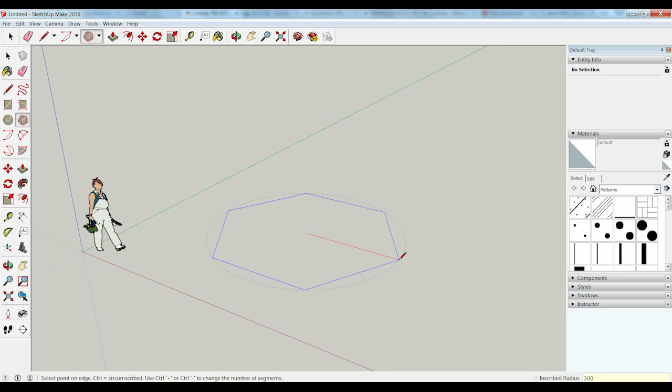The second thing is you always start with the center of the polygon, the hexagon we're drawing now, so click anywhere near here. Then you drag but don't click, just drag out. I try to be parallel with the red, which is the x-axis, and the inscribed radius you can see now is about 2300 millimeters, which is not correct because we need a 3000 millimeter radius, making a 6000 millimeter diameter.

So I type in 3000 and enter, and there you have this blue hexagon. It's quite big compared to Lisanne here, but it's not too big because we're gonna cut it in half.

So the second step is we go to the line tool, this little pencil on the top left corner, and it's very smart software that SketchUp offers. The snapping is automatically done for you, so you just go near the endpoint, one of the endpoints. Of course I'm going across in parallel direction to the red axis, so I start with this endpoint, so it snaps to it and turns green, the little dot.

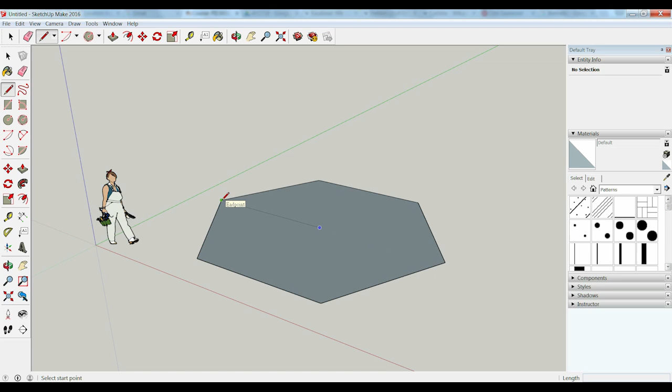Once it turns green, you can click on that and extend it while it's orthographically along. You can see the red line along the face, running parallel to the x-axis and all the way across to the opposite point, and it snaps to it. It says endpoint, and then you can click.

So this is perfectly done to bisect the hexagon, and we only need half of this. The easiest way is to use your eraser tool, which is on the top left corner, this pink eraser tool here, and erase one of these 3 edges, and then it will get rid of the face and all the edges associated with that half of it.

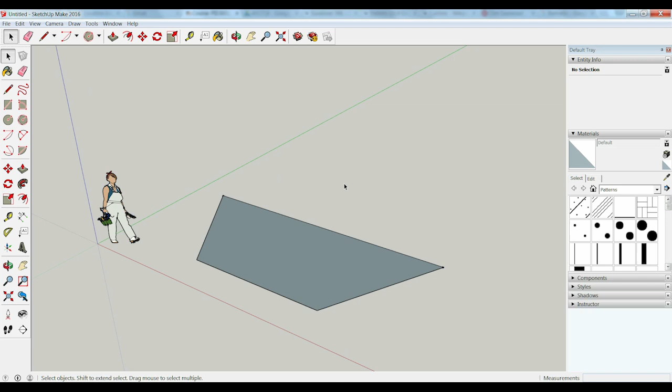And then we have the base for the window display, or the window to be built already, and you want to double check. You can always measure the length. I'm not concerned about the length of these 3 sides; all I wanted to do is check that I have 6000 millimeters across, and look, so we're good to go.

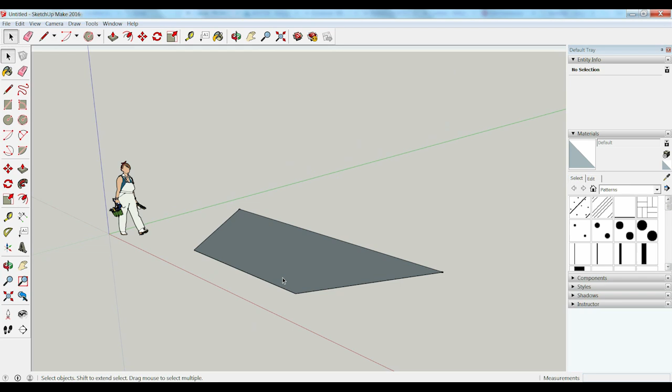Now we are about to bring it into a volume. So first thing is you need to know the height measurement. Pull on this face and type in 600, so that's 600 millimeters in height. And you want to click, but before you click, you want to press Control, that's the CTRL key.

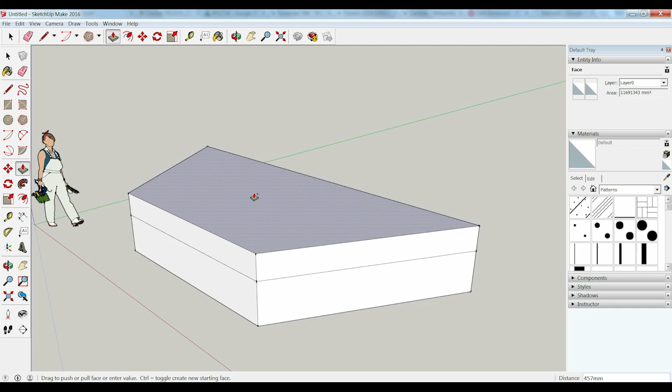And you see a little plus sign next to the push-pull tool. So when you now click again, you're not changing what you've done before, you're not changing the height of the first segment, but instead adding an extra one to it. And we want to type in 2000 millimeters, so that's the height of the window.

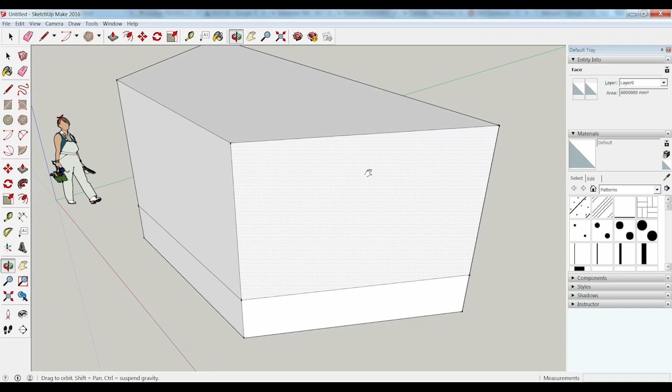And then, okay, the last segment would be 300 millimeters, so you want to keep doing that and type in 300. So there you have the whole shape, the whole volume, the whole form of the window display.

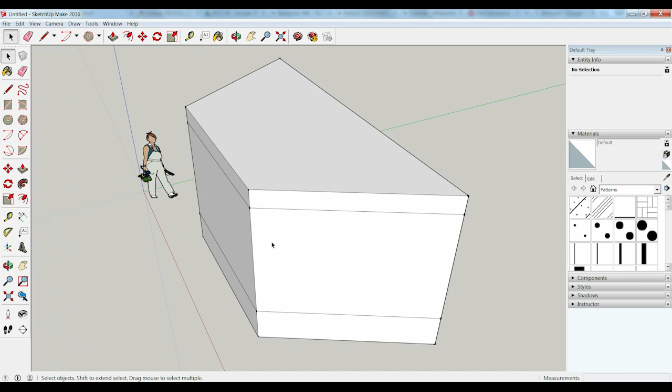But we don't need that much depth to the sides, so we want to cut that in half again. So the next step would be to repeat what we did before when it was like a base. We could definitely have done that before we pull it, but it's just for demonstration.

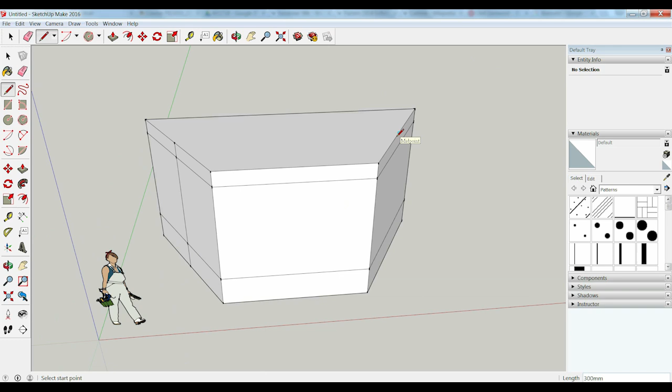I'm gonna show you this. It's the same deal, that if we do this over, even in 3D forms, you can always draw lines by snapping to the midpoints or endpoints or any points of your choice, to cut or create edges or bisect anything that your design calls for.

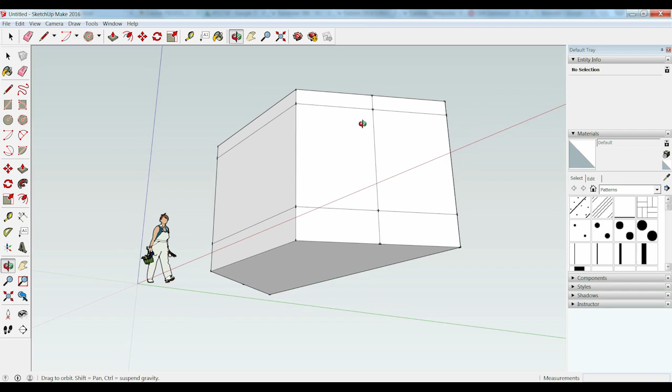Make sure you go through the bottom too, from all four sides - top, bottom, left and right. That's the same as what we did before, just erasing the back edges of all these faces. And there you go, you have this.

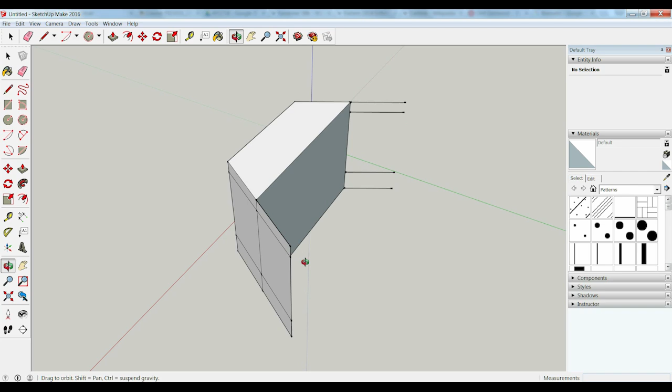Of course, I'm doing some extra work just to show you around how you could go about cutting a 3D form in the 3-dimensional space.

Well, the last bit is you have to draw in the lines that you need. Don't forget about these crease lines or segments in the back of the window, because if you don't, later when we make the windows, it might not work if we want to add some depth to it or change details. So this is a play-safe way that I always do - I try to keep all the faces quadrilateral so they all have 4 sides. No matter what shapes they take, they always have 4 sides. That's one important principle in 3D modeling.

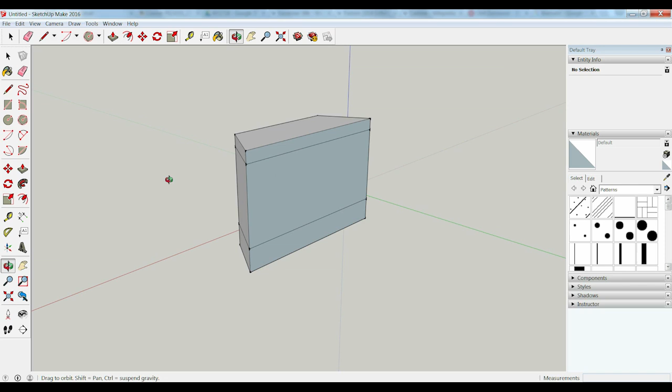The next step would be to do the windows. So now I activated my offset tool. It's really up to you how wide you want to go, but I am going to stick with just 50 millimeters to offset the windows.

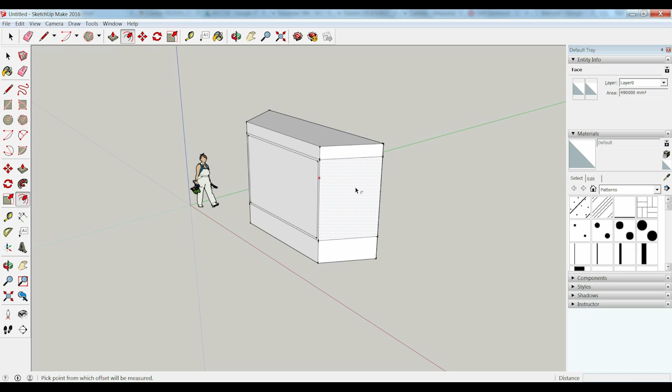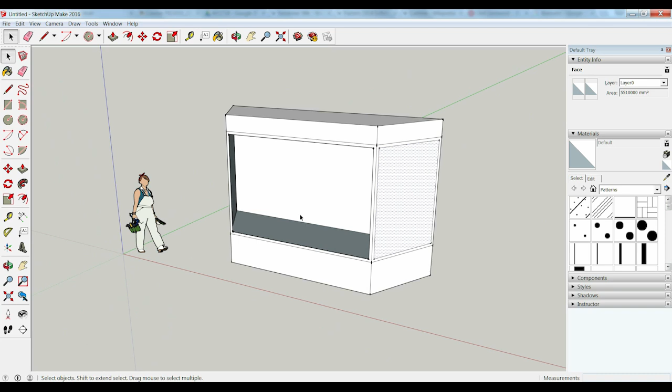And we put it to the sides, like that. Of course, I don't have a true window now until I go about deleting these faces, right? So I just delete them, and now you have like a 3-sided half a hexagon kind of shape.

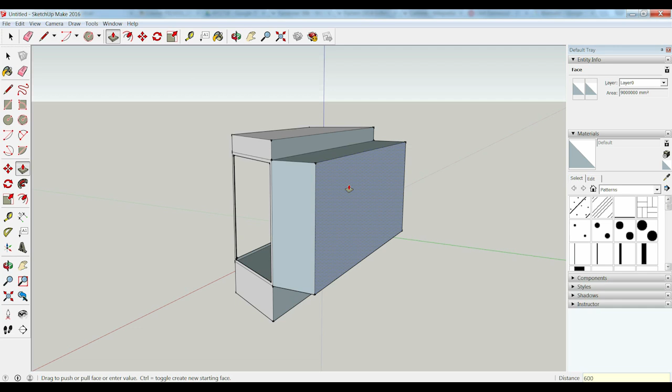One thing is you can move, but then I've just changed my mind. I just want one more segment, say like that, and then I can always say, didn't want to do 800, just do 600, and you can keep doing that for all the segments. It snaps automatically onto the edge of the endpoint you want it to go to, so that gives more depth to the interior of the window display now.

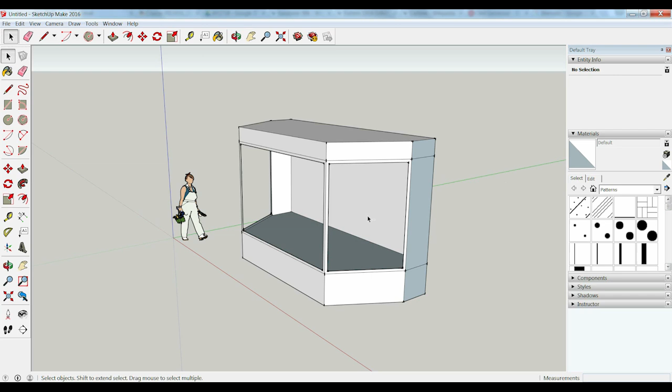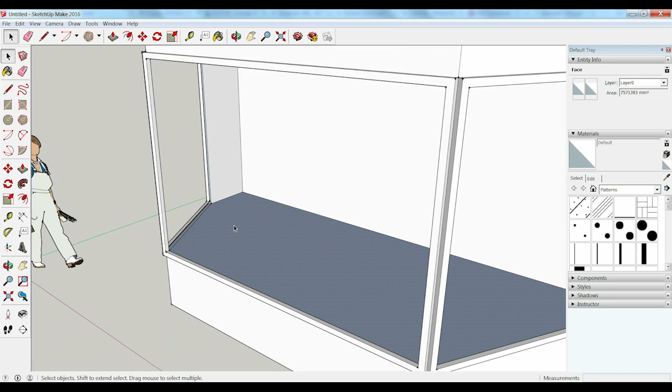In order to make sure I have the correct face normal - that's what we call the direction of the positive face facing towards the camera - what I would go about doing is select this floor. If you look at it, it's blue now, and I want to turn it into white. It's not about color, it's an indication of whether we have the positive or correct direction of the face normal facing the camera. And what we want to do is right-click on that, so RMB.

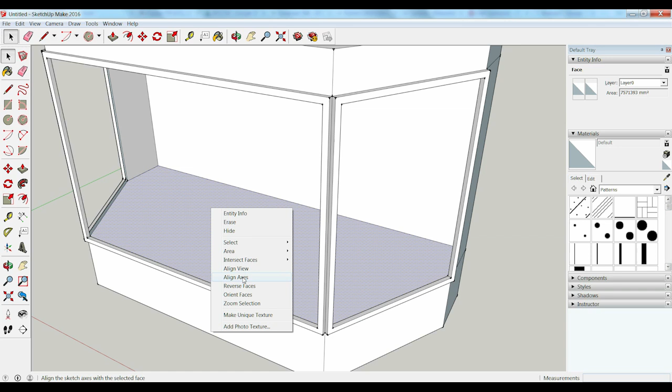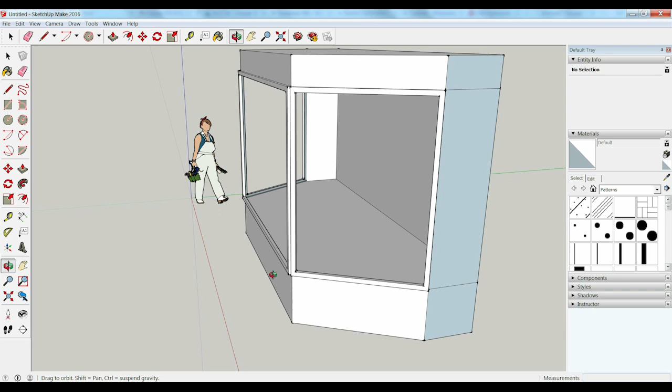Now I'm going to reverse faces. You see that? Okay, if I keep doing it, I can sit here all day flipping this face around. So it's a matter of judgment, not the operation. You have to be able to tell whether it's the correct face facing upward like you wanted it to be, or whether it's the blue face facing down or facing inside, which is not cool. So this is the operation you could do - to flip the face or reverse the faces.

On the front I have it alright because it's always facing to the front, to the audience, to the passerby. But on the sides, or even the back of it, we have a dark blue face. It's a negative face, so we will have to fix this before we save this and finish off the window case.